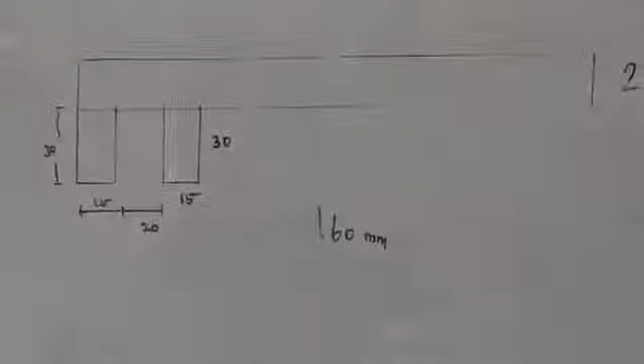Inside this you can make a height of 20 mm. You have to draw this line at 20 mm height. Draw a horizontal line for 10 mm, draw 20 mm height. This height is 20 mm, width is 10 mm, in line with this. Similarly, you can draw a 20 mm line, a 10 mm line, and close this diagram.

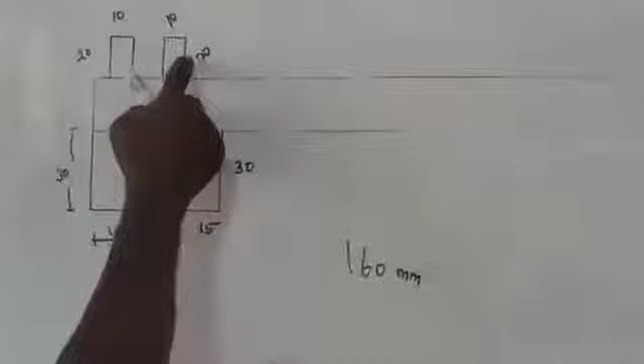10 mm, 20 mm - what you need to keep in mind is that this line will coincide. This outer line, this outer line here - this outer line should coincide with this line. Keep this in mind, I will tell you why later.

So next, this is a part. Now you just note down the dimensions for reference purpose.

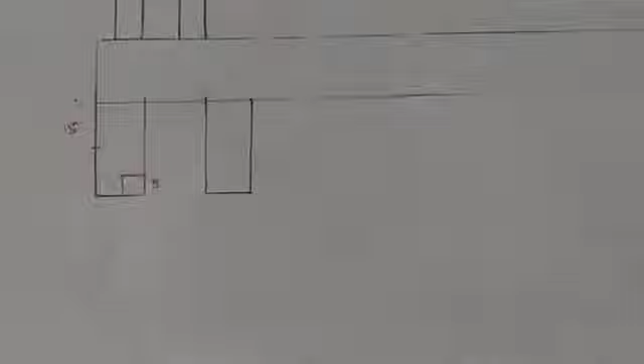Take from here to 15 mm. So we take 15 mm. From here to 5 mm, you make this point as a reference point. From 5, you make this reference from height to height.

So you can draw this taper line from here to here. This is a taper line. Similarly, you mark from here to 5 mm also, here, and mark this line as a taper line.

Now you can mark this as a curved line. So from here to 5, you mark this line as a curved line. This is the height, from here to 5, like that from here to 5 mm, you can make this line from here to 5 mm.

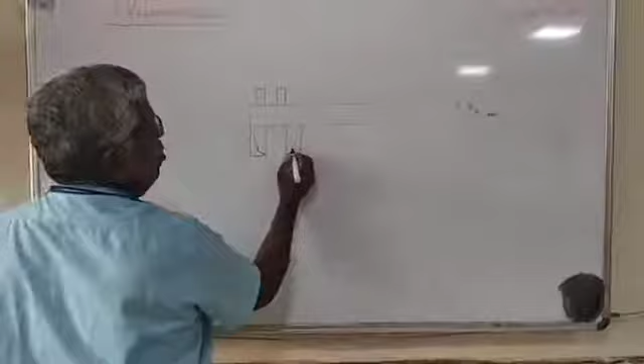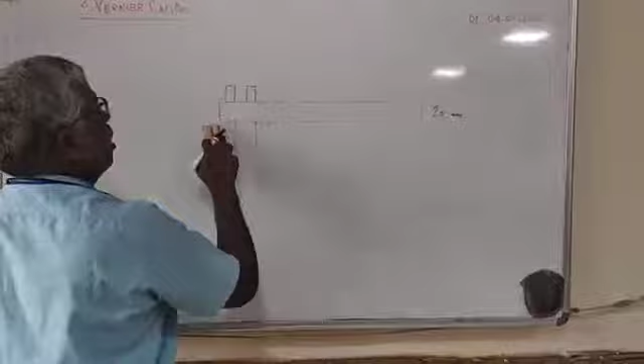So this is our required line. You remove this unwanted line. This is a caliper edge.

Now we move to the top. This is a caliper leg. So you make a 2 mm line here.

Height is already known as 20 mm. From this you can make 8 mm. So mark 8 mm. You mark this curved line here and fix it. Then remove this - mark it as a curved line.

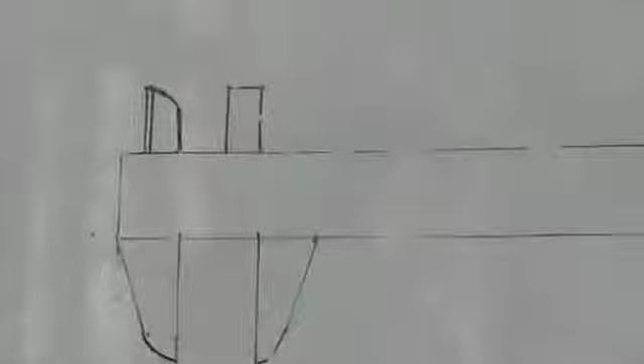Again, this is a reference. Again 2 mm gap - you have to mark another line. So make here, from here you make a curved line. This is not required. This is a bottom, this is a top.

Now we go for the measurements. We already know it is 20 mm. Just from here, make a center line. Mark a reference line. This is only for reference purpose, not for any other purpose, to get a uniform measurement.

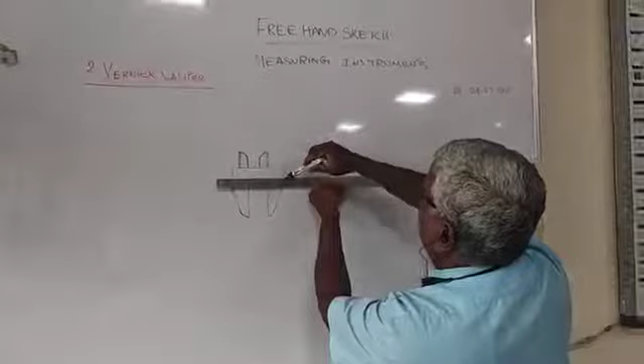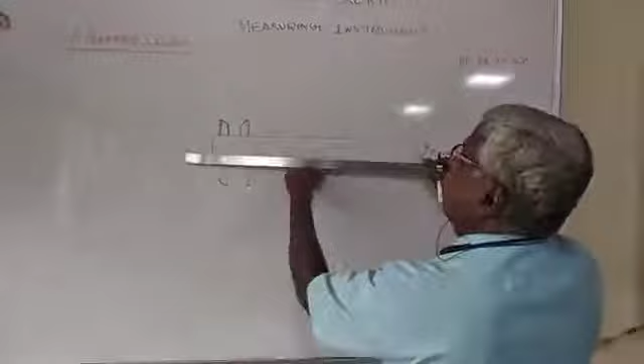Out of 20, take 10 mm and 10 mm, mark a reference. From this, you can take a 3 mm height - 3 mm, this is totally 10 mm. So you draw another line for 3 mm, for this area, not the full area.

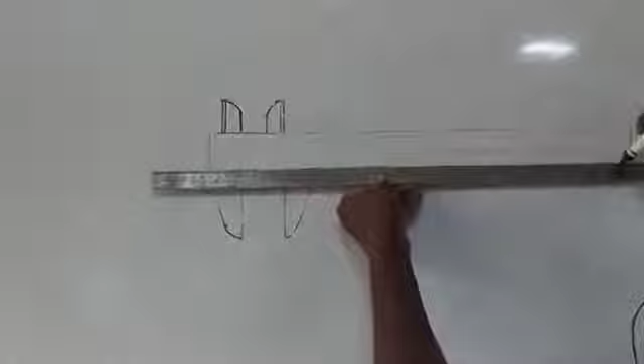All this is for reference purpose only. So you can start your zero reading from here. The 3 mm line, you have to start reading here. This is your zero line.

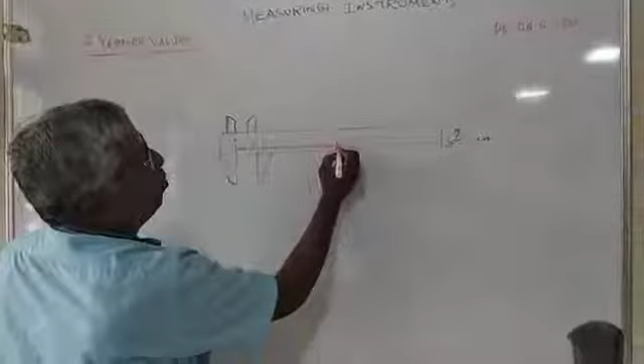So with this you have to mark 1, 2, 3, 4, 5. Go to the top, 10 mm line at the top, and mark 1, 2, 3, 4, 5 again. Continue marking this sequence of 1, 2, 3, 4, 5 along the scale, upper and lower, like that you have to mark.

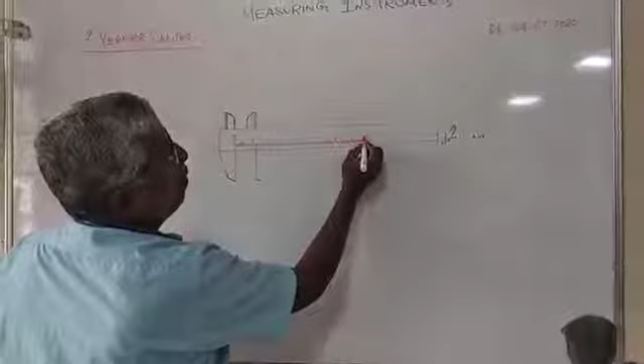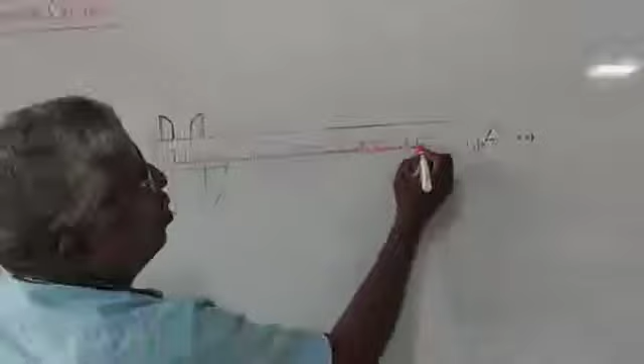So it is very important. This is a scale, a reference scale, so you have to mark carefully. If you mark erratically, the diagram will look awkward. That's why I am always making a reference line, for the purpose of understanding and giving a good look to the diagram.

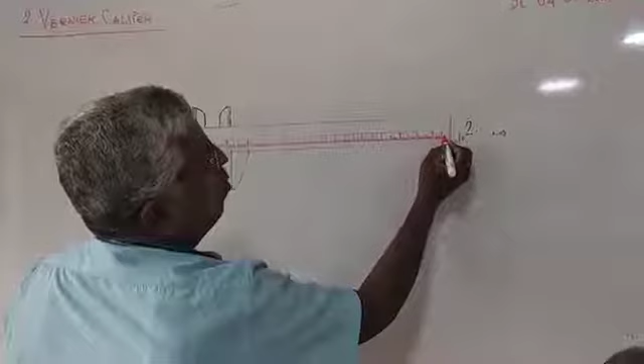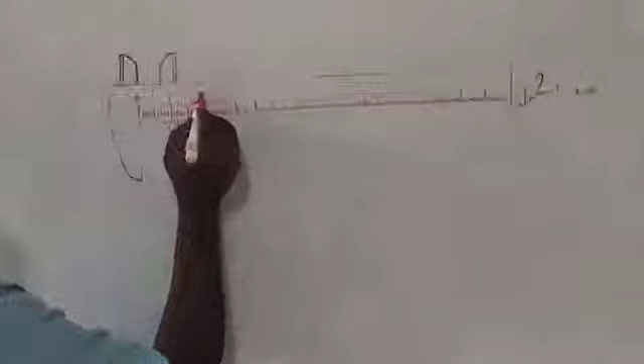So this is 1, this is 2, this is 3, this is 4, 5, 6, 7, 8, 9, 10, 11, 12, like this. This is the main scale reading.

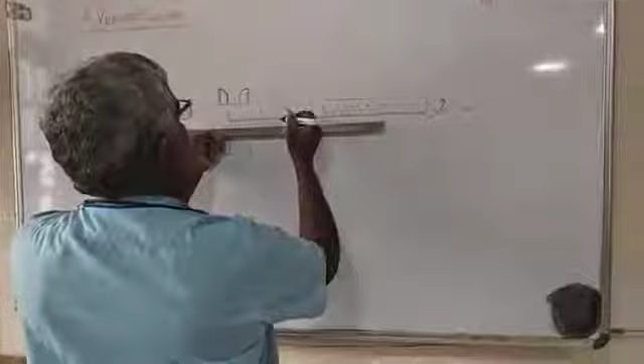Now we move to the vernier scale reading. Already we made a line from here to the 3 mm line. Likewise, from this bottom line you make a 3 mm line here also, for a length of 50 mm. You dot this line for 50 mm, and then you connect this line.

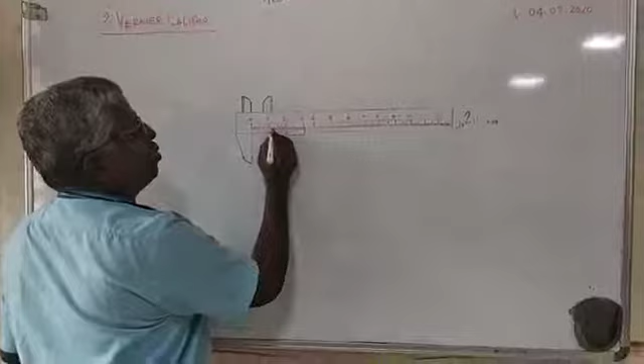This is your vernier scale reading area. Again, you make this as 10 parts. Make a straight line like this, one, one, one, like this.

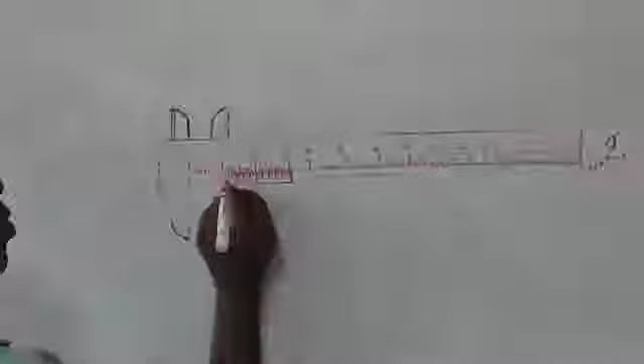Make the first line as 0, 1, 2, 3, 4, 5, 6, 7, 8, 9, 10. So you make this vernier caliper. This is very, very important to do in a clear manner, so you have to draw all the lines.

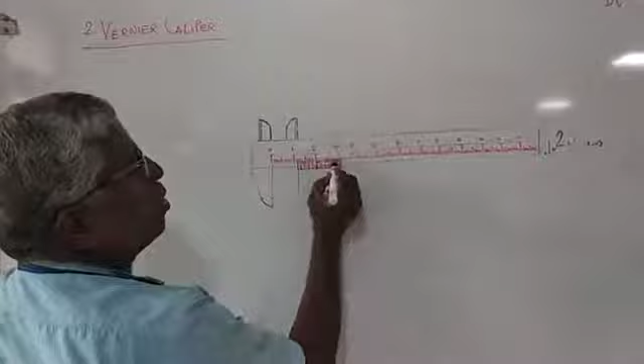Now if you take the reading, one line is matched with this 0 line, and another line is matched with another line. This is the vernier scale.

Now how to move this vernier scale? You make this part for keeping our thumb and moving it. In a similar manner you have to draw here also.

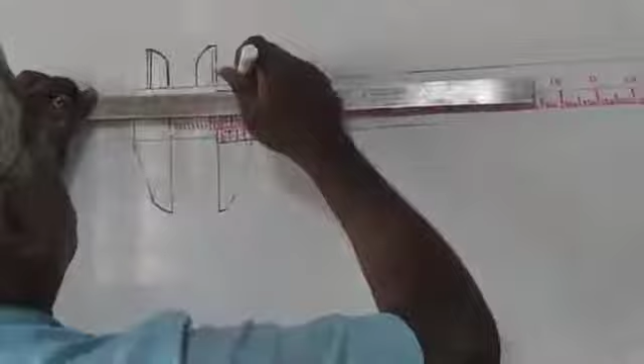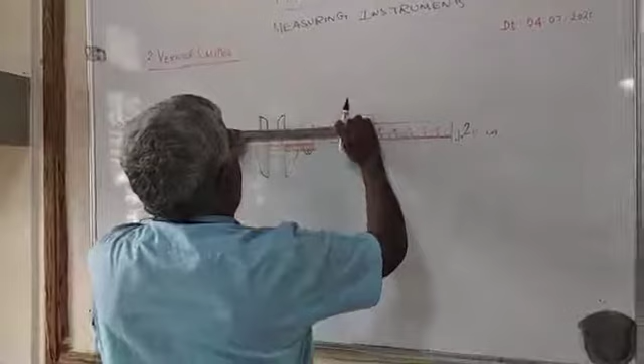Top and bottom, you make a 3 mm height, same width. Top 3 mm, top 3 mm. So you have to draw similarly the 3 mm line also.

Top also. So if you want to give a more aesthetic look and reference, you make an undercut here for 5 mm. Similarly, you can make an undercut here for 5 mm, and here also 5 mm, and here also 5 mm.

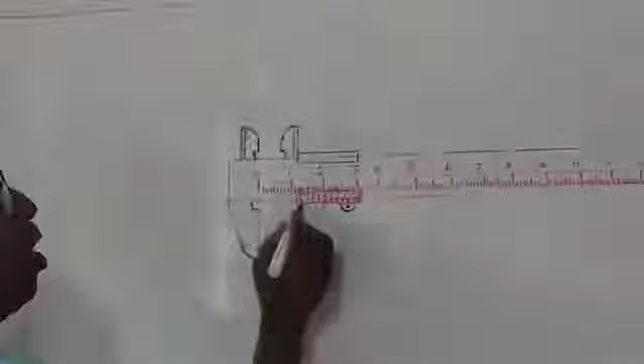So now whichever line you need, you can dark it. This is our required part of the line. You can dark the line whichever is required, and the remaining line you have to remove. This is our required line.

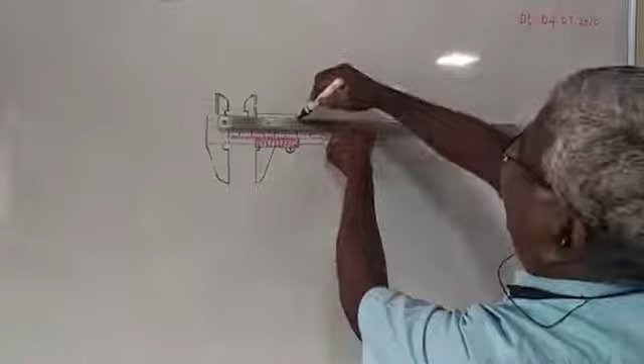There is some groove arrangement in the bottom and top also. You can give a 2 mm gap so that you can draw that groove also. If you give more detail, you can get very good marks. Similarly, you also have a groove, a bottom groove also is there.

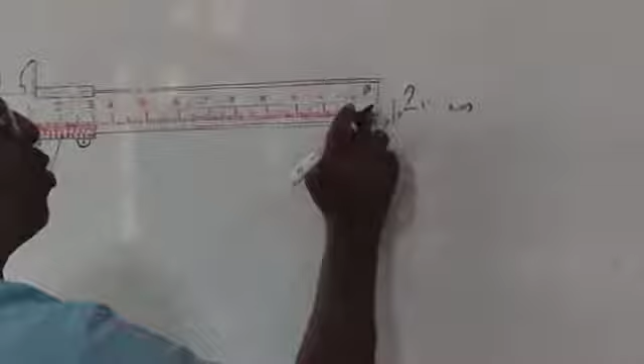There is a locking screw here. There is a locking screw, here also a locking screw is there. And very importantly, another one is the depth gauge.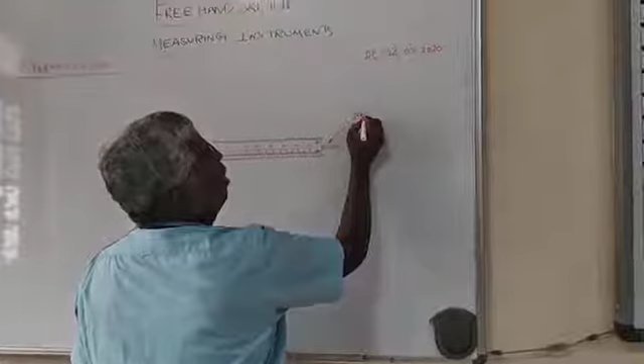For a length of 40 mm, you have to draw the depth gauge and make a step here. This is the step. Now you can mark as per the second part, for 45 degrees you can draw, and mark an arrowhead.

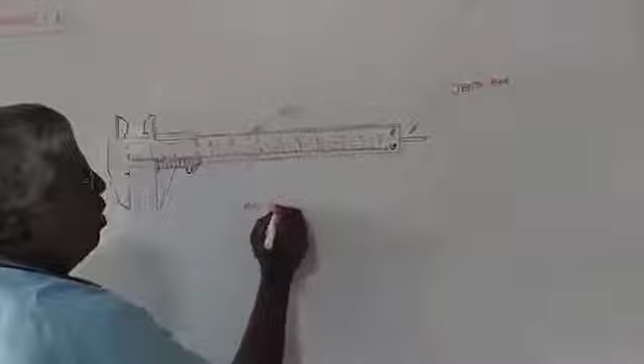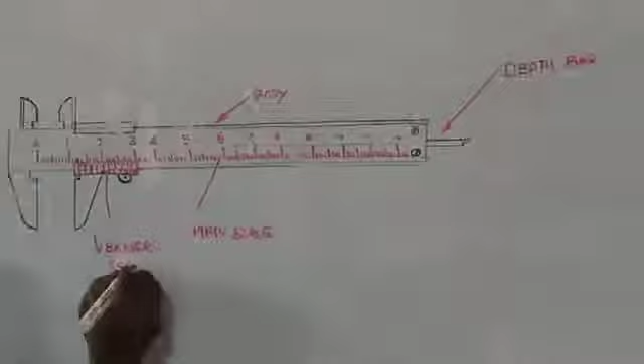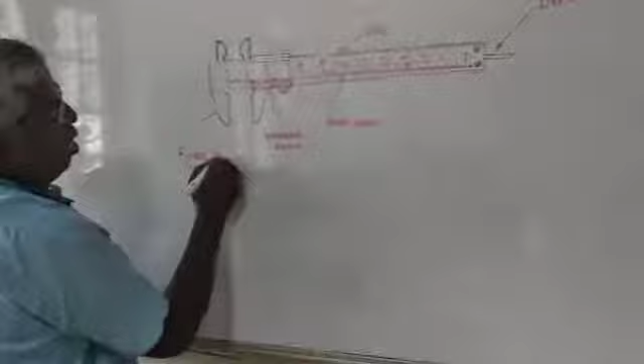This is the depth bar to measure the depth. This is the body of the vernier caliper. This is the main scale. This is the vernier. This is the fixed jaw. In general, this is for outside dimension, and this is for inside dimensions.

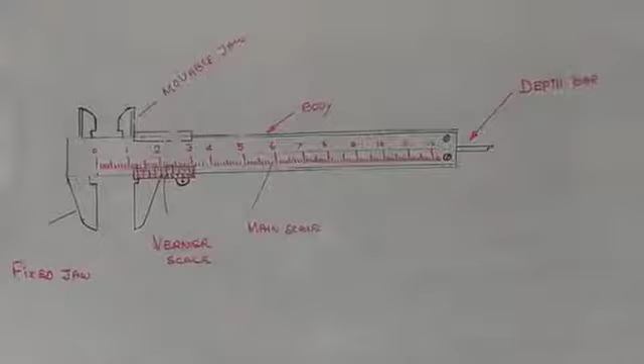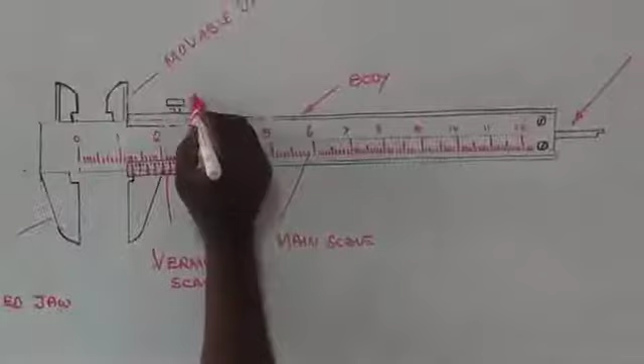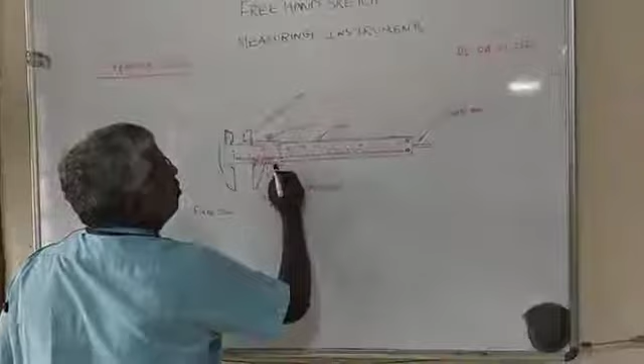So we have to make another one also here. This is the lock nut. Correct it.

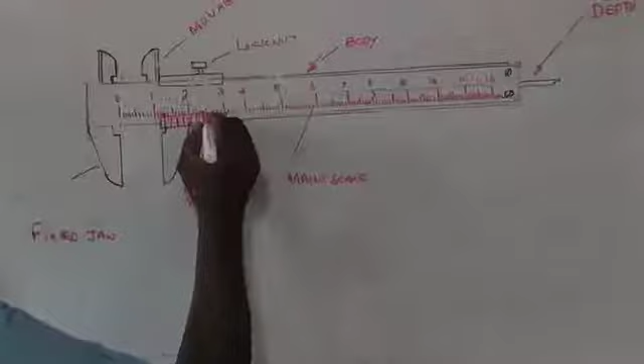So almost we complete the diagram. If you want to give more detail, you can add a groove. This is a pin. Like this you can extend a lot of things.

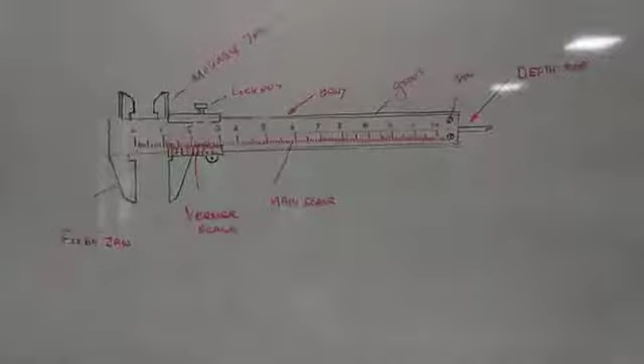So if we complete the diagram, now let's just recap the vernier caliper, how to draw it again. Once again I'll recap how to draw it. Make a 160 mm length, 20 mm width. Make the first rectangle of 20 mm by 160 mm. This box's height is 30 mm and 15 mm.

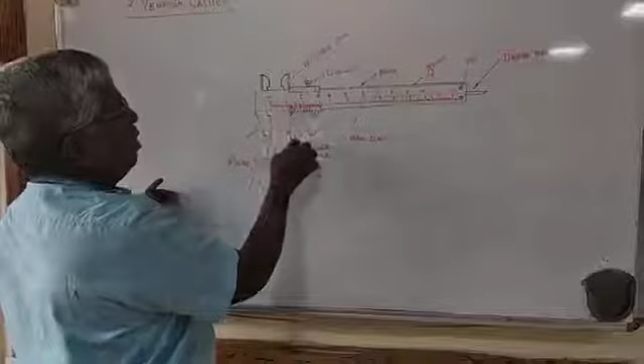So the gap, make it say 20 mm. Again this box's height is 30 mm, it is 15 mm. Keep in mind, from this reference line you make a line here to a height of 20 mm, width is 10 mm. You make another rectangle here with this reference line, make a box of height 10 mm.

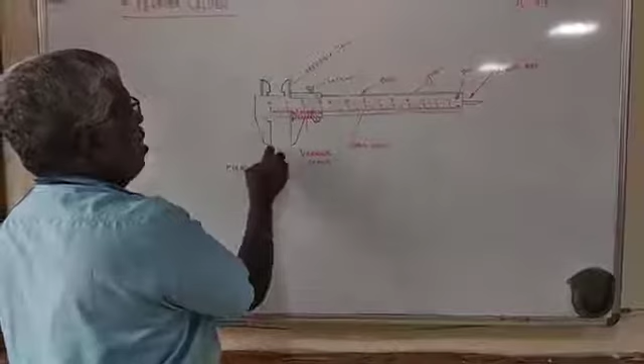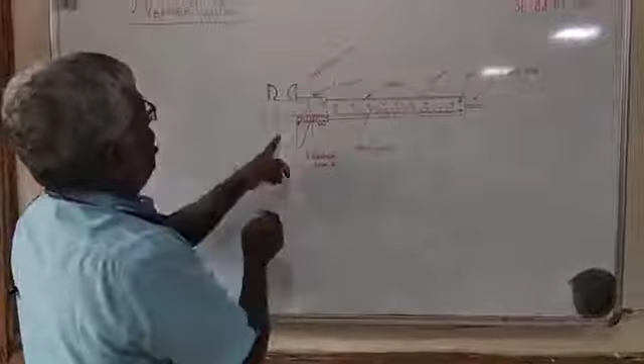So from the box end, from here to 5 mm, mark a line here, make a taper line and a curved line. Similarly, make a taper line, curved line, your bottom jaw is finished. Similarly here, this top jaw, this is your reference line. This is your measuring area.

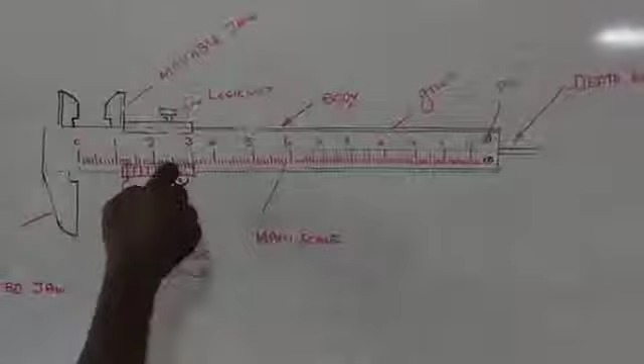So you make this as per the diagram given, and make this as a moving blade. This is a lock nut. This is a vernier scale. So with this 20 mm, you make a center line as a reference line for marking these scales, and from here to 3 mm another line you can mark, so that the dimension will go above these sides.

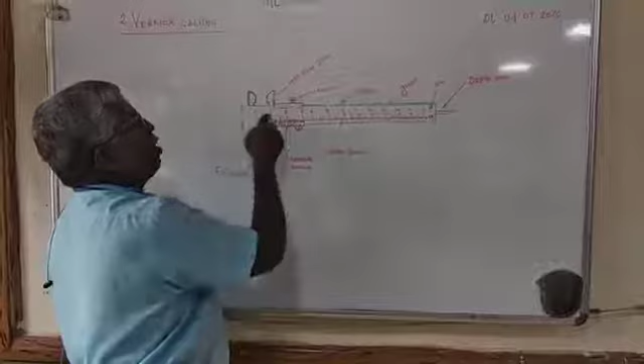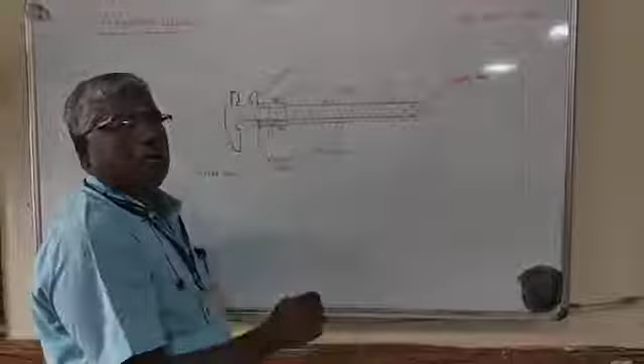Mark as given here and make a length of this 50 mm vernier scale area. This 50 mm divided into 0, 1, 2, 3 up to 10 mm, you have to divide into 10 equal distances. This is a push bar or push button to move the vernier caliper. This is a lock nut.

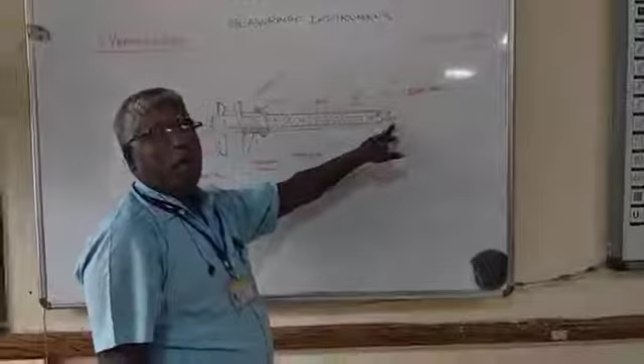This part is used for measuring the outside diameter. This jaw is used for measuring the inside diameter, and this bar is used for measuring the depth of the slot. So with a single instrument we can measure the outside dimension, inside dimension, and depth of the bore. Thank you.